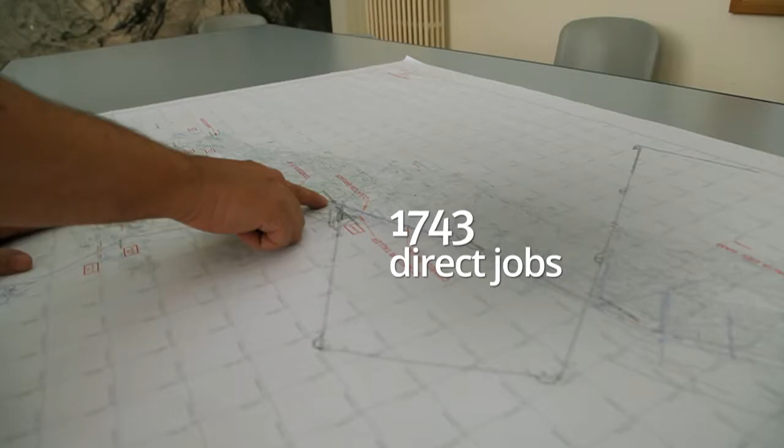For nearly 20 years, ICL has been managing the Súria and Sallent potash mines. This is the only potash production company in Spain, and its business activity is one of the main economic motors of central Catalonia.

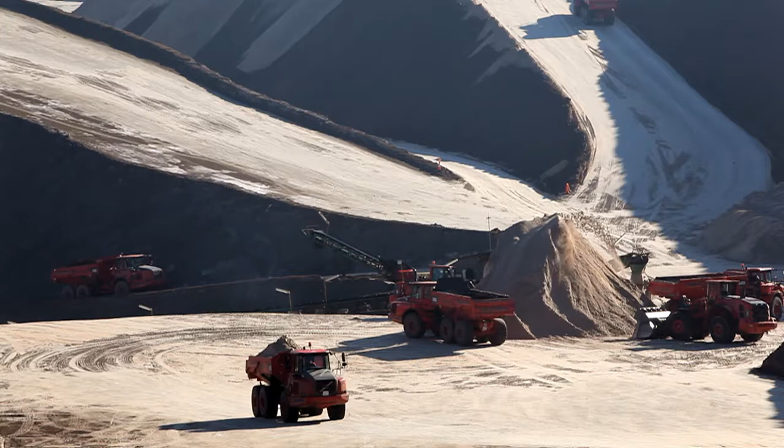The potash and part of the salt extracted are sold, while the remaining salt is stored for future use and consumption.

The Phoenix Plan has enabled the company to put the highest quality vacuum salt on the world markets as of this year, 2016. With an investment of 450 million euros in the first two phases, the Phoenix Plan is a great opportunity for the industrial growth of central Catalonia.

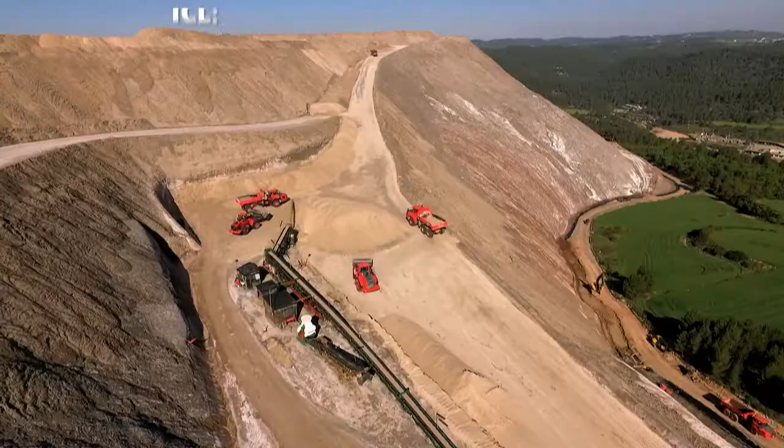ICL is committed to excellence in environmental management and is constantly improving its processes to care for nature and its ecosystems. The management of the water that reaches El Cogulló salt deposit is an essential part of ICL's environmental protection policy. ICL takes all the necessary measures to ensure environmental sustainability.

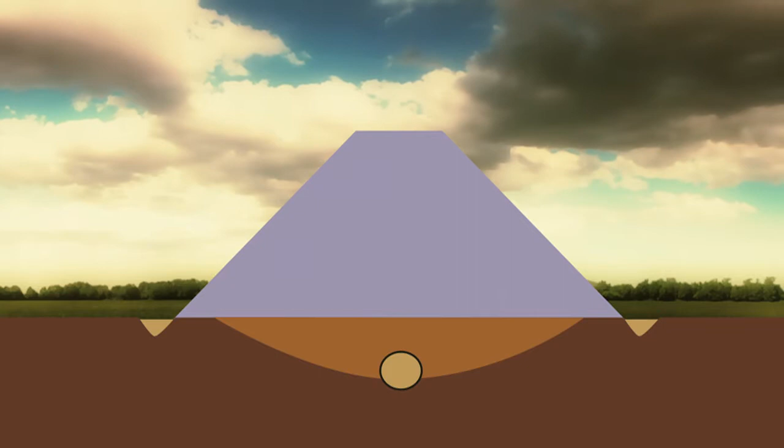Hydrodynamics have taught us about the way water behaves when it comes into contact with a salt deposit. Through the years, the nucleus has undergone a crystallization process, becoming completely waterproof.

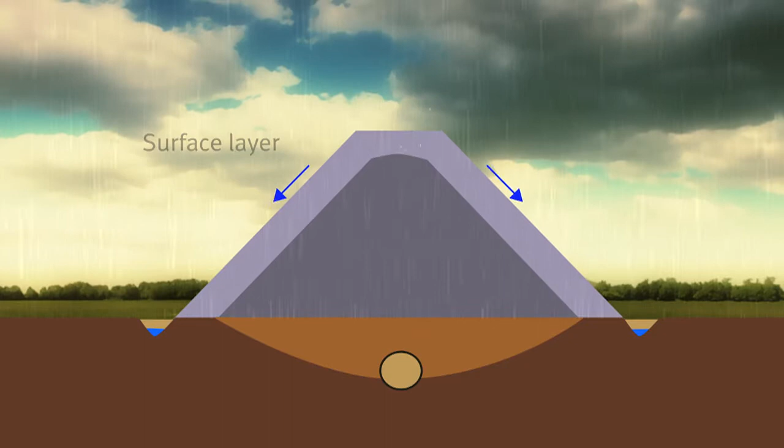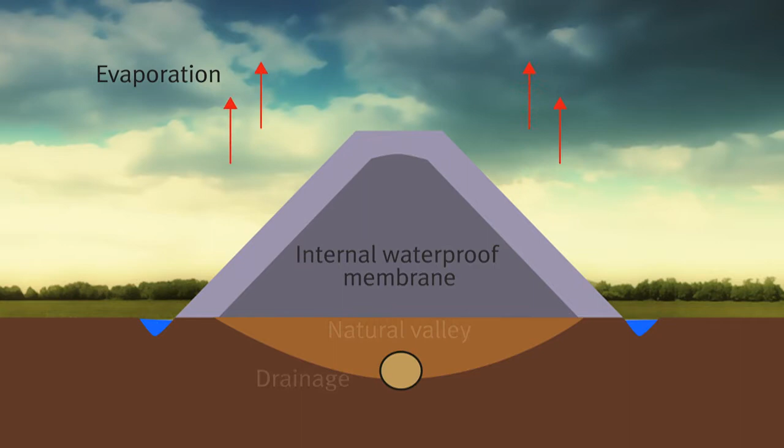The water slides over the most superficial area of the mountain and collects in the encircling perimeter canal. Part of the water that runs through the internal waterproofed layer runs into the same canal. The other part of that water, following the incline of the natural valley, runs down into the lower drains.

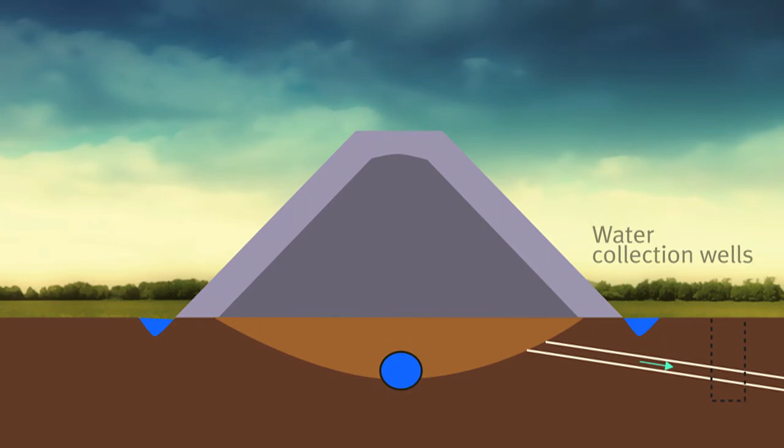If, along its path, the water runs into limestone veins, which have certain permeability, it is intercepted by means of collection wells and then transported to the collection pond. From there, it flows into the brine collector.

ICL has a system designed to collect the water from the salt deposit and guarantee its total control. The company has installed a waterproofed canal that runs along the mountain, collecting the salt water.

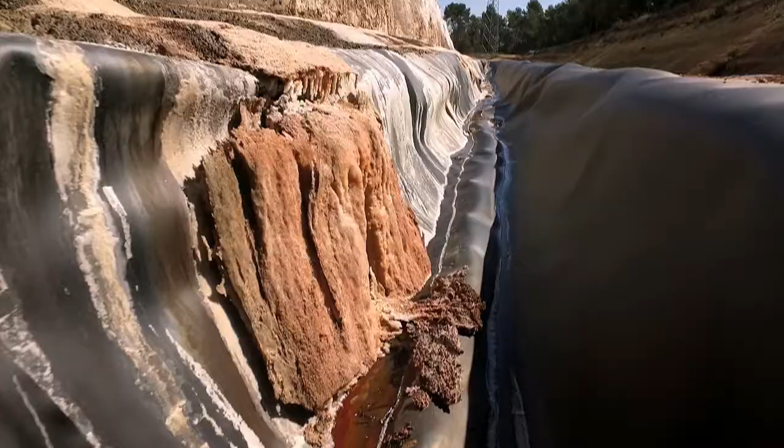A second parallel canal channels the fresh water to keep it from coming into contact with the salt water. A pump system at the lowest points in the system then transports the water to the salt deposit collection dam.

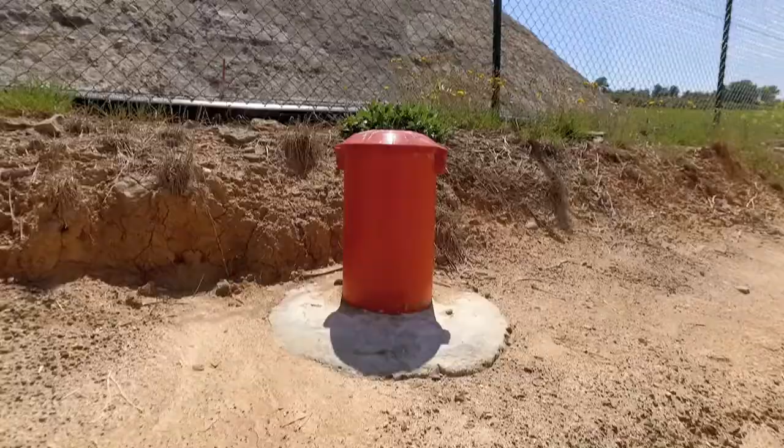The underground water piezometric control network allows the company to monitor the circulation of the underground water and, if necessary, to extract it. Geological studies enable the detection of any water that might circulate through a limestone vein. In such cases, that water is extracted and redirected to the collection dam.

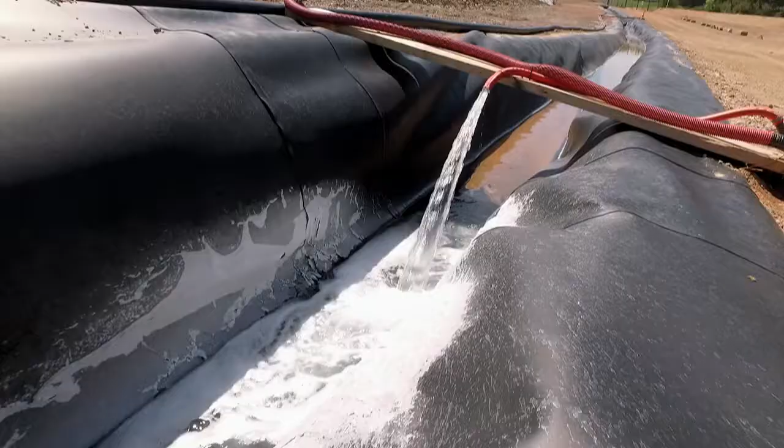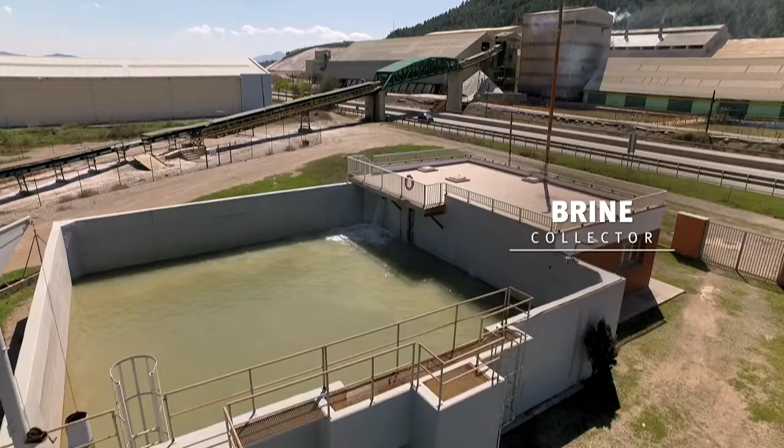From there, each year, 250 million litres of water are evacuated through a canal system to the brine collector, which is owned by the Catalan Water Agency and managed by an officially authorised company. The collector transports the water to the treatment plant at El Prat.

ICL pays its part for the use and amortization of the brine collector, as do all the other companies that use it. ICL only accounts for around 15% of the total volume of the water that runs through the final section of the collector.

ICL is the first mining company to obtain prestigious international certificates for quality, environment, and occupational hazard prevention and health. The company invests around 10 million euros a year in environmental measures and systems just to protect nature. ICL is steadfast in its commitment to uphold its environmental policies and to continue to work with the

public institutions to improve the environment and ensure a sustainable future. At ICL, we are committed to the environment and we are sustainable.